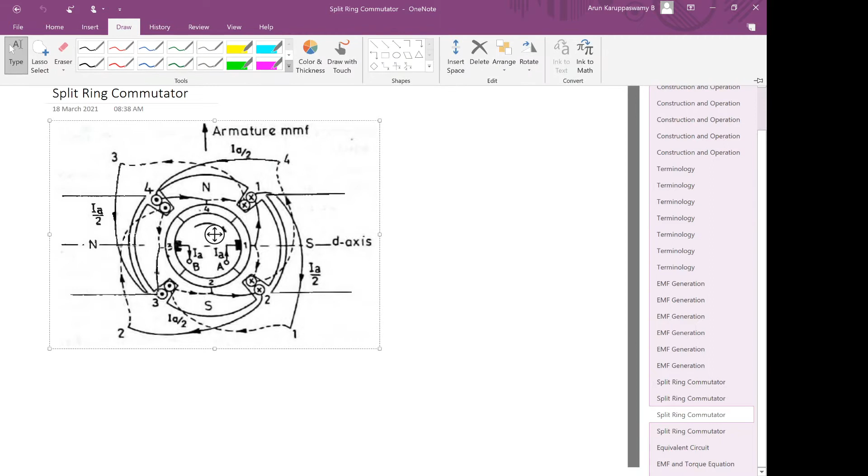So the process is reverse here as compared to a generator. Here DC is being supplied and it is getting converted into AC. So we can say that the conversion is from DC to AC - it is an inverter, an inversion process is being done, it is getting inverted. Earlier it was rectified, now it is getting inverted.

Let us try to understand how this happens. To understand this, let us take a two-pole DC machine again, but here we would like to understand a few more concepts related to the actual DC machine. So we will consider more number of slots and more number of conductors in the rotor. Instead of two slots which we had earlier, we now have four slots - slot 1, slot 2, slot 3 and slot 4.

So there are four slots, and in each of these slots you now have two sets of conductors. You need to understand that each of these conductors is part of a full pitched winding, a full pitched n-turn coil. So if we consider slot 1, there are two sets of coils, and we are just talking about one set of coil.

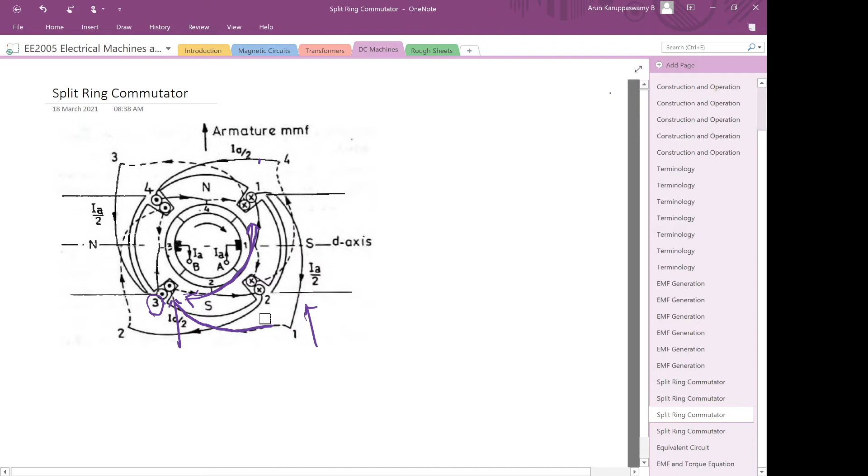Let me erase these things. Now we have got some basic understanding that there are 4 slots, and each slot has 2 coil sides, 2 sets of coils. Because you need one coil from one slot and another coil side from another slot to make one n-turn winding, you can expect that. So there are totally 2 plus 2 plus 2 plus 2 equals 8 crosses or dots that you see. So 2 of them together make one n-turn coil, which I had drawn now. So this one n-turn coil requires 2 of them. We have totally 8, that means 4 n-turn coils are present in this drawing.

You need to remember that each of these coils which we are drawing are themselves made of several turns, like we had seen earlier. They are made of several turns of the winding, so they are drawn like this. They are n-turn coils, they have n number of turns, each of them. So this is what you get. We have 4 n-turn coils which are placed in these slots in this particular drawing.

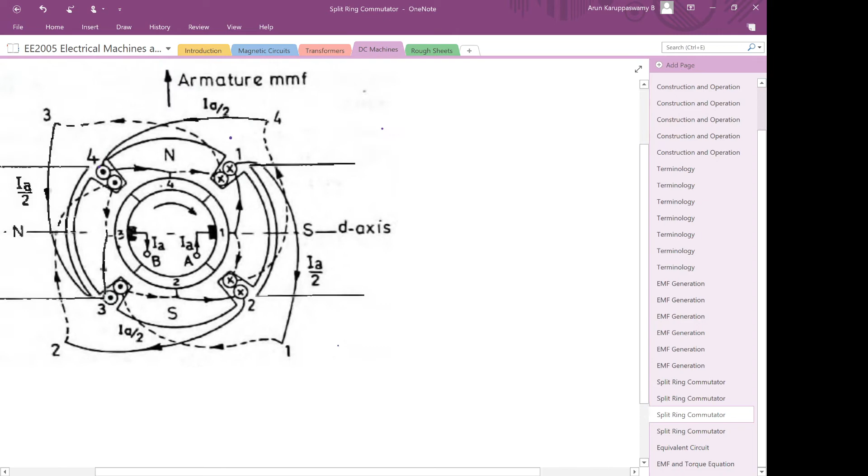Now the current which is entering here enters into A and then enters through the brush, it enters segment 1. You can see that there are 4 segments in the commutator. The brushes are only 2 in number, but the number of segments of the commutator has increased because there are 4 slots, there are 4 segments. Earlier there were only 2 slots and there were only 2 segments, segment 1 and segment 2, because 2 slots were there. Whereas here now in the present case there are 4 slots and so there are 4 segments.

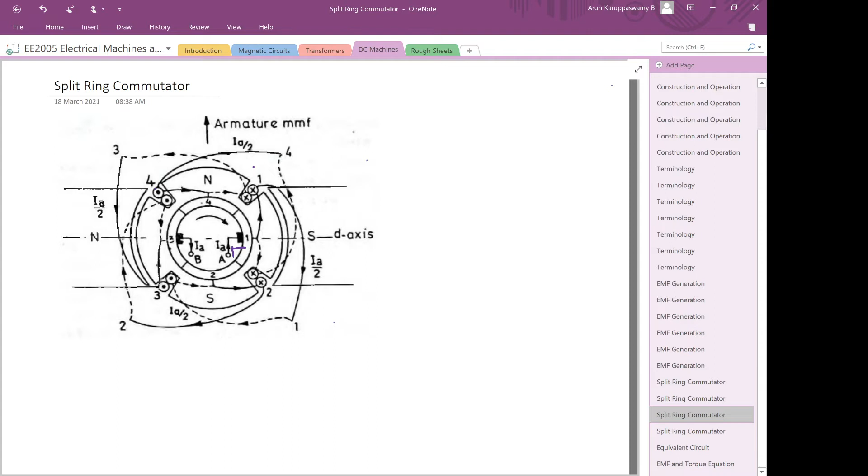Now let us see what happens. The current enters through A into segment 1, and in segment 1 you can see that the current splits into 2 paths. One goes to the top conductor of slot 1. Let us call this as top conductor and this is bottom.

The current coming in has two paths. The total current is shown as IA, it enters here and splits into two: one path goes to the top conductor of slot 1, and the other goes to the bottom of slot 2.

Since it is a full pitched coil, from the top conductor of slot 1 it goes all the way to the end, then back to slot 3's bottom conductor, carrying a current of IA by 2. Similarly, slot 2's conductor carries current all the way through and back to slot 4, also carrying IA by 2.

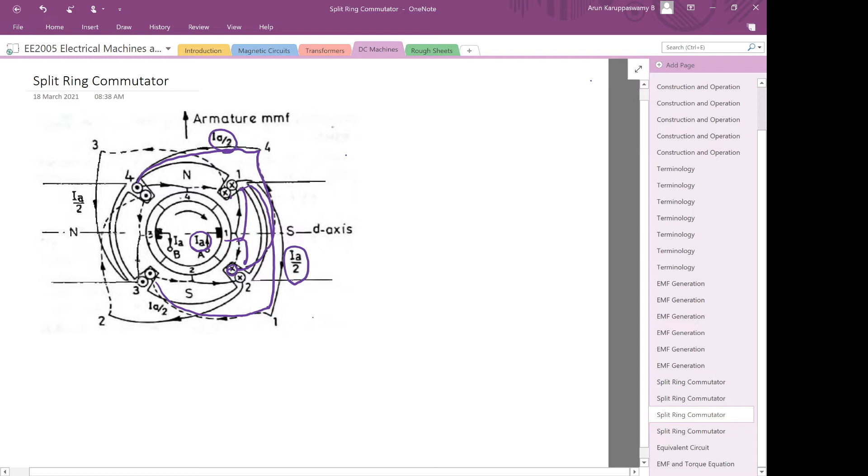So the total current supplied from outside, indicated as IA, the armature current, splits itself into two parallel paths from here. Let us try to trace these paths.

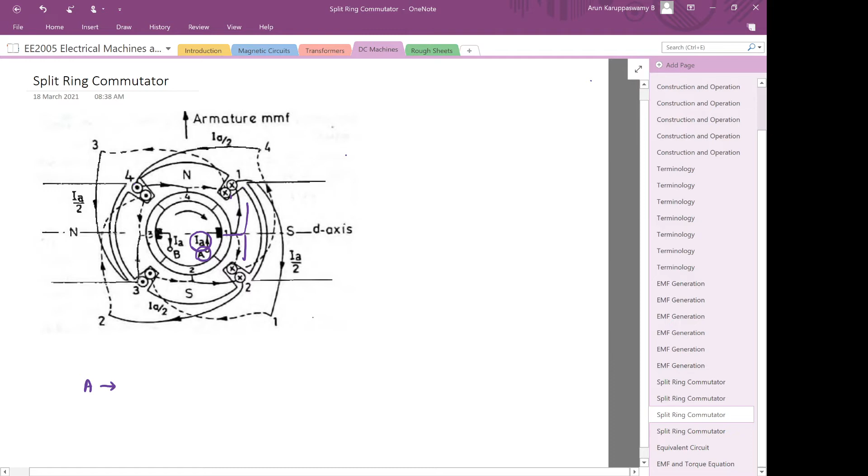The first path enters at A, goes to commutator segment 1, and from commutator segment 1 it goes to slot 1's top conductor, then all the way to slot 3's bottom conductor.

From there it goes to commutator segment 2, and through commutator segment 2 it reaches slot 2's top conductor, then all the way to slot 4's bottom, then to commutator segment 3, and then out again to B.

So from A you get IA, and from B you get out IA, but from C1 it splits into IA by 2 only. So from here to here it is only IA by 2 — this is one parallel path.

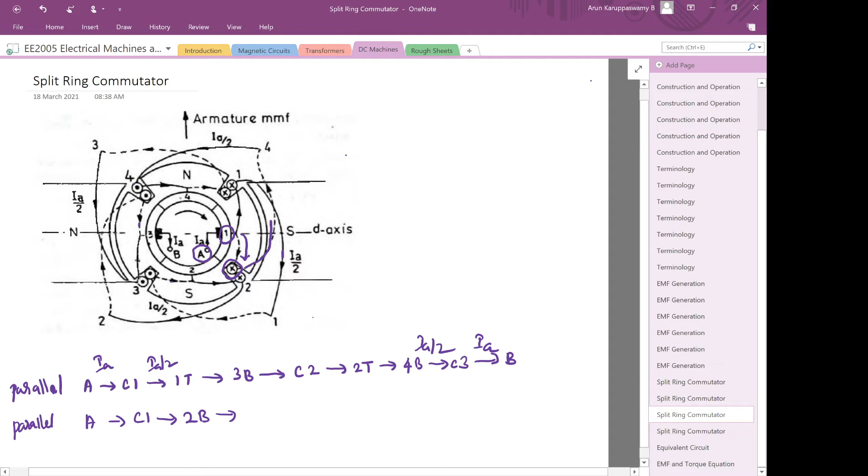Because it is a full pitched coil, it has to travel 180 degrees, so it goes to top of slot 4, then to commutator segment 4, then to slot 1 bottom, then 180 degrees again to slot 3's top, then to commutator segment 3.

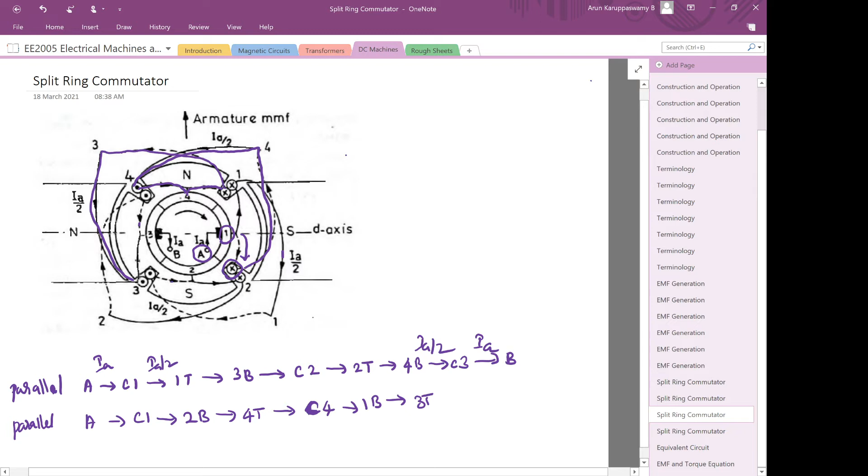Then it goes to B. Here again it is only IA by 2 and IA by 2. So you can see that from C1 it takes two paths, and similarly from C3, two paths come and merge — from 4 bottom and 3 top it comes to C3. So there are two parallel paths for the current.

If we try to put it in schematic or circuit form, you will find that the current enters through A, then there is a brush, and this current IA goes to two different sets of windings. One is slot 1 top and slot 3 bottom.

You need to remember that this winding is an N-turn full pitch coil, so it goes to an N-turn full pitched coil starting at slot 1 and ending at slot 3. At 1 it is a top coil and at 3 it is a bottom coil — let us just call it 1-3 for simplicity.

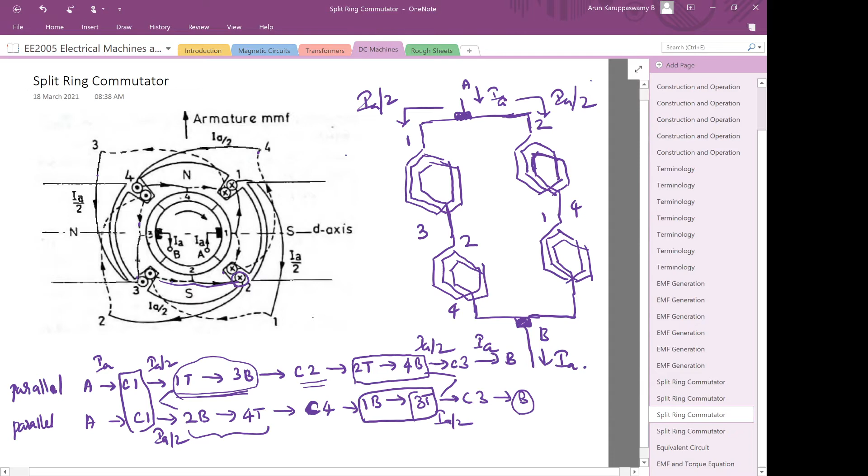So through a brush it enters, and then the currents split equally and go through two sets of series connectors. So there is a parallel connection, two parallel paths are there, and then two series paths are there in each of these parallel paths. Okay, so there are two series connected windings, and each are n-turn winding.

So this is an n-turn winding, this is an n-turn winding, this is an n-turn winding, and this is another n-turn winding. Okay, you need to remember that each n-turn winding itself has 2n number of conductors, because each n-turn has two coil sides.

If you take a one turn of a coil, then you know that this is one coil side, this is another coil side. We have seen this earlier. So when we talk about n turns of a coil, we are talking about basically 2n conductors. Okay, 2n conductor coil sides. So one turn has two coil sides, and so this n turn has 2n coil sides.

So totally there are 2n into 4, so 8n coil sides or 8n conductors which are connected in some fashion to get this thing. Okay, so this is one aspect that we need to know, that in the actual DC machine the connections are made in some series and parallel arrangement, and that together gives rise to some voltage.

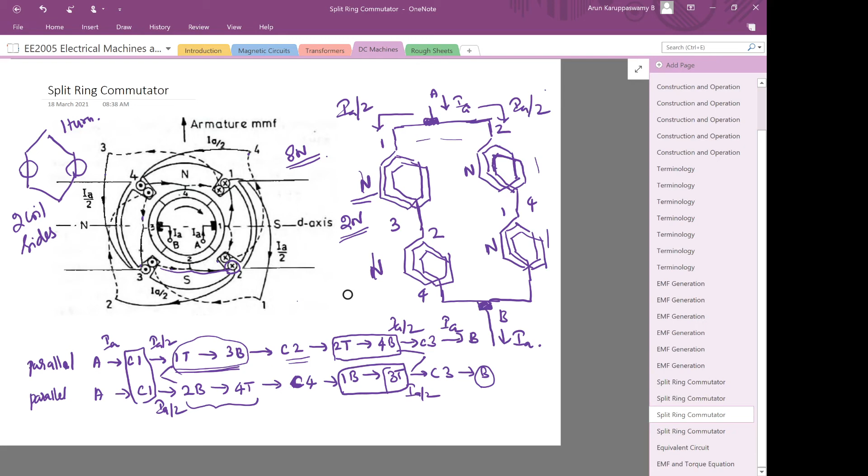Okay, so you need to understand that these parallel paths, different parallel paths, help in sharing the current. These parallel paths help in current sharing, so that for a given size of a conductor, if you have more parallel paths, you can increase the current rating. And the series connections can help in achieving higher and higher voltages, because for one n-turn coil you have already derived a certain voltage.

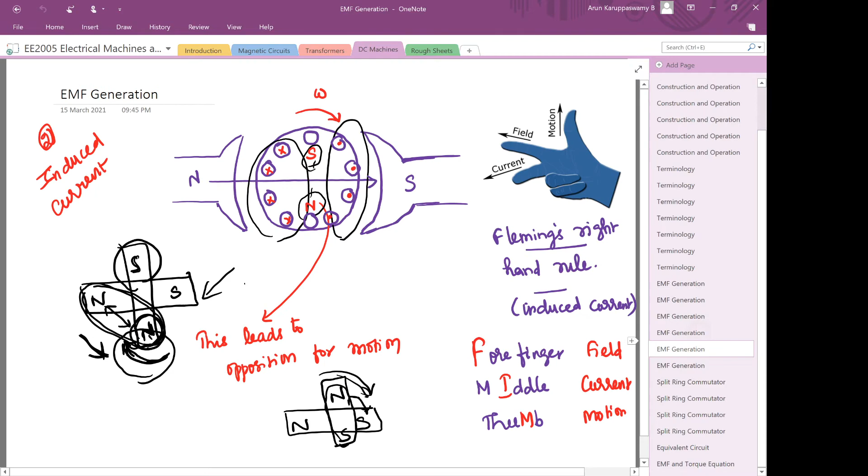You know that the EMF induced for one n-turn coil is given by this expression. So if you have another set of n-turn coil and you connect them in series, then the total voltage will add up. So you can expect that the total voltage will go up.

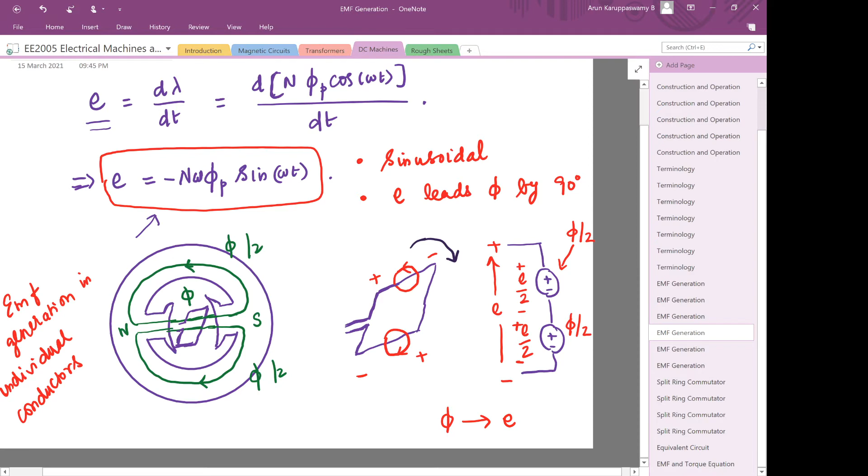Okay, anyhow, you need to remember that when you are adding two AC voltages, they will add up vectorially. We will come to that series, means how the voltages add up, a little later. So as of now, you can understand that if you want to increase the voltage level, then we need to series connect the coils, and connecting having parallel paths will increase the current rating.

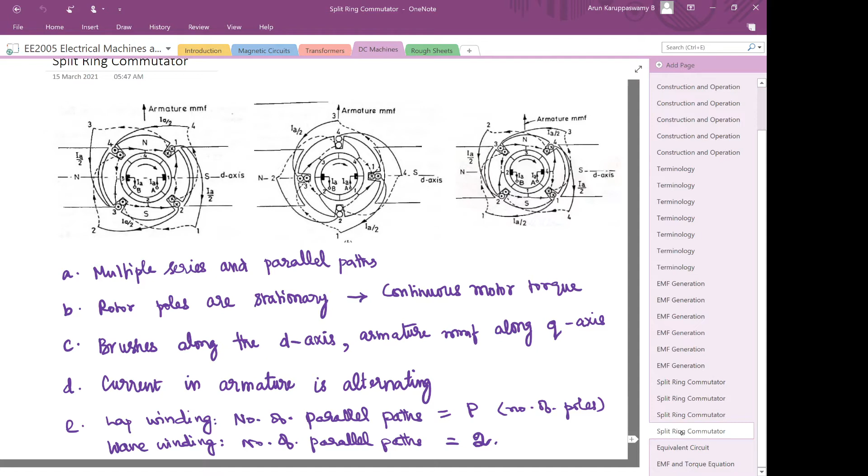Okay, so with this idea, let us now look at what happens when the rotor rotates. So this first drawing is the same as what we were discussing now. So the current enters and there are four commutator segments, and you have a certain connection, interconnection.

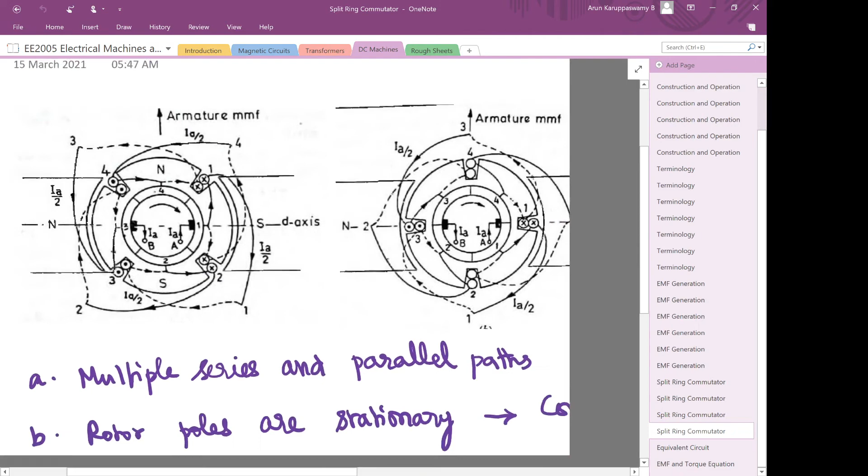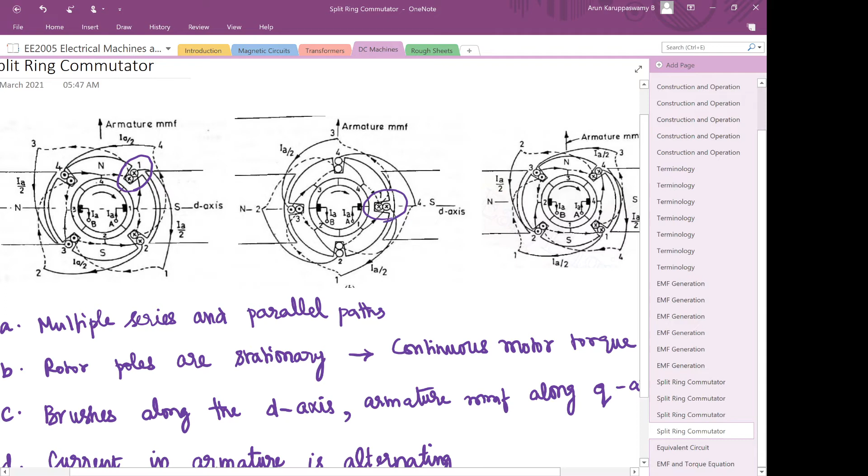Now let us say that this rotates by 45 degrees, then this first slot will come here. Similarly, this slot 2 will go here, and so on. So when you rotate the rotor by 45 degrees, this is what happens. If you consider this as the reference 0 degrees, then this will be 45 degrees and this will be 90 degrees from that. What I mean is, if you take this first drawing to be a reference of 0 degrees, then after 45 degrees is what you get, and after 90 degrees is what you get this.

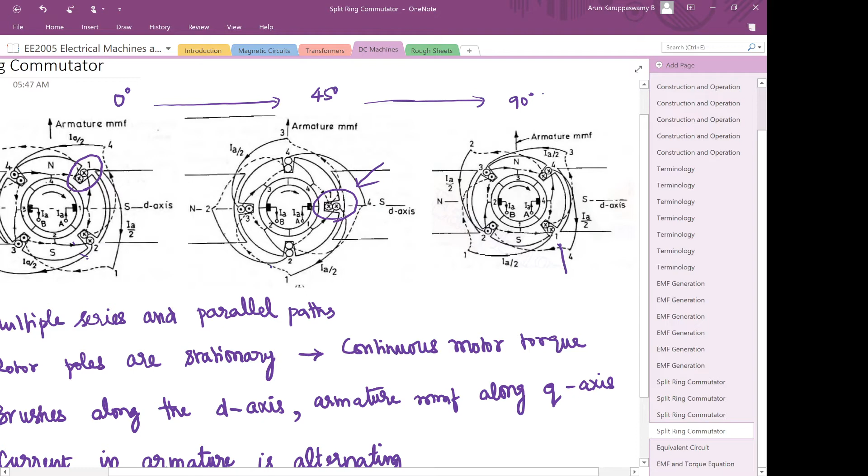Okay, so you can see that again, one to start with was here, and one moved to this point after 45 degrees, and then again it moves to this point after another 45 degrees. So likewise it is rotating.

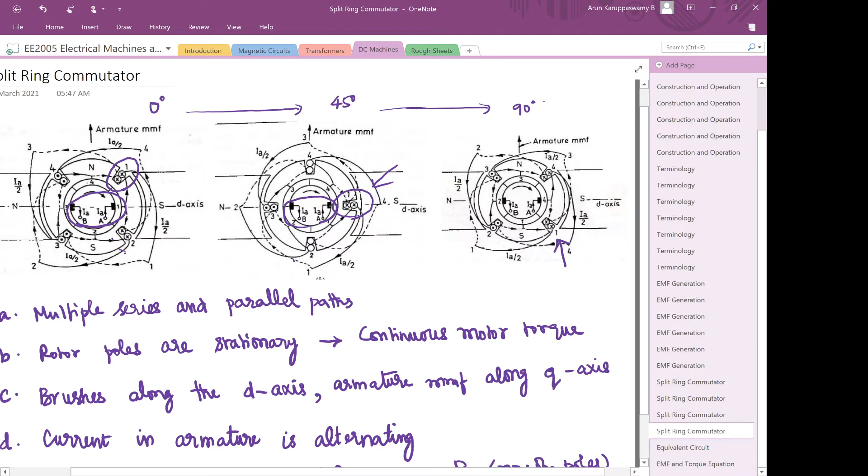There are a few observations you can make here. If you look at this segment arrangement, the brushes are always stationary, they remain in the same position, and usually these brushes are kept along the stator axis - north, south. North is here, south is here. So the central line connecting these two is the axis for this north-south pole.

This magnetic axis of the stator is called the direct axis, and the one which is perpendicular to that is called the quadrature axis. Quadrature means at 90 degrees, so at 90 electrical degrees to it is the quadrature axis.

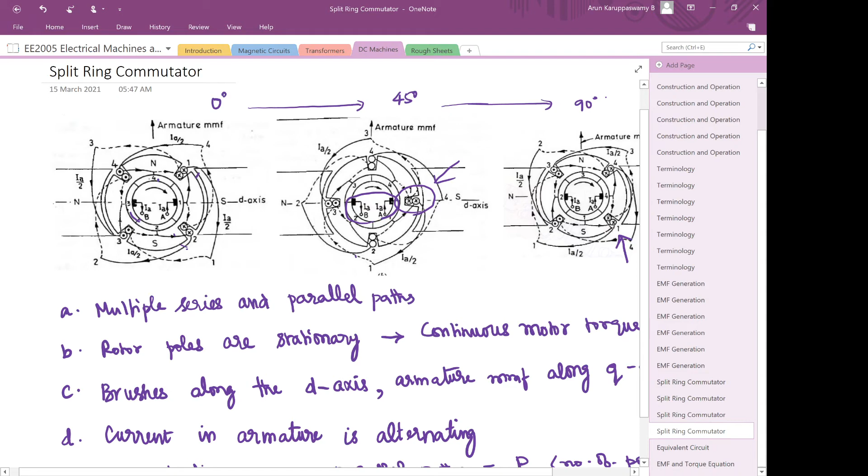Now usually these brushes are always kept along the direct axis. There is a reason for that - keeping it along the direct axis helps in a certain way. Let us see what happens.

If you keep the incoming brush here, you can expect that the conductors on this side, because this is connected to whichever segment is appearing here, the current will enter through this and split through these two. So current will always enter into the coils at these locations, or the conductors here will always be X marked - that is, current going into the coil at this corner.

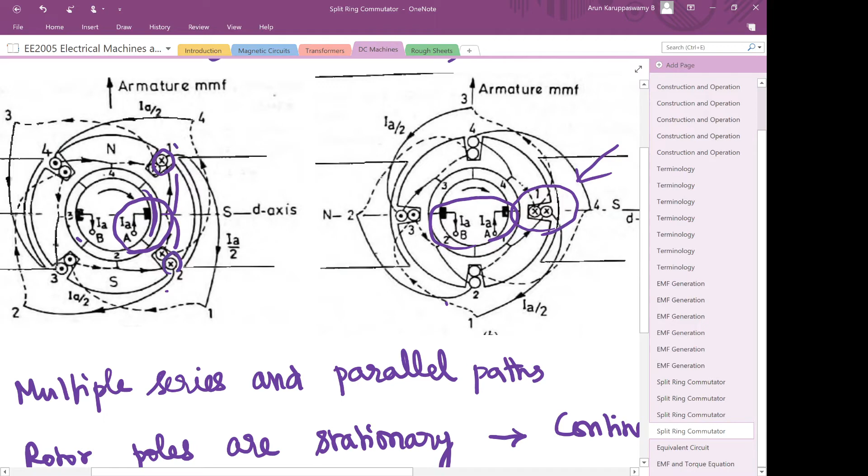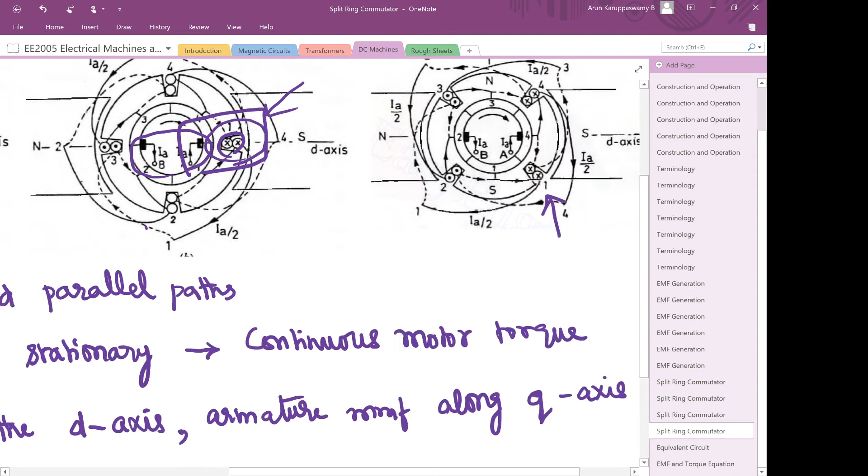That is because you have the brush fixed at the same location. So here is the location where the current is entering. It will go through some nearby segment, split into two, and enter the coil at these two locations. You can see in all these drawings that the coil on this side will always have X marks - the current enters, splits into two, and goes into the coil here and here.

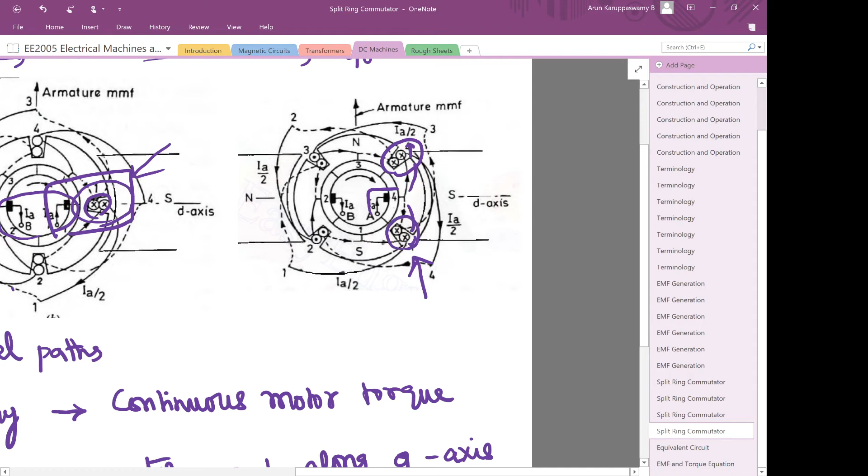So if you analyze in the same way as before, you will find that the coils under the south pole of your stator will always have the X mark, and the other side will always have the dot mark.

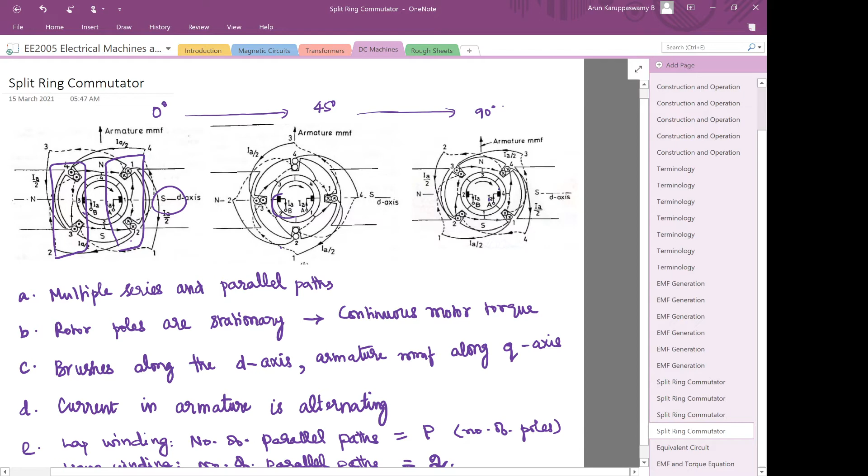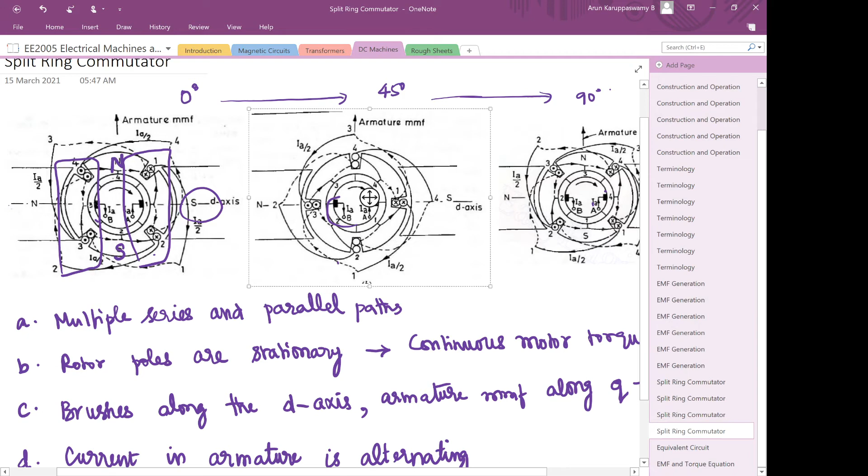Because of this, for the rotor, this will always be the north pole and this will always be the south pole, irrespective of the rotor rotation. This happens because of the commutator in a DC motor or even a DC generator - the north and south poles of the rotor are always fixed even though the machine is rotating, because of the commutator plus brush action.

Because the commutator brush is fixed to one location along the direct axis of the stator, this enforces the north and south poles to be fixed along the quadrature axis.

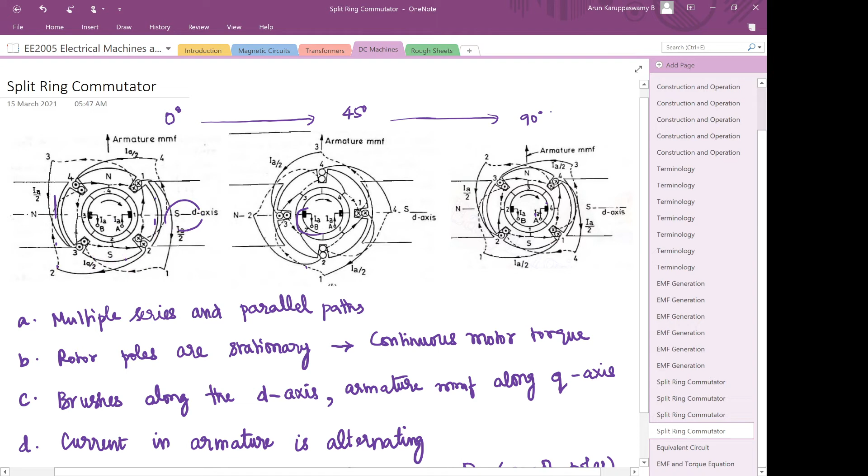Now this helps in a way, because we had already seen that in case of a DC machine operating as a motor, the motor rotates because the north-south pole here tries to align along this north-south pole. That is what helps in the rotor rotating.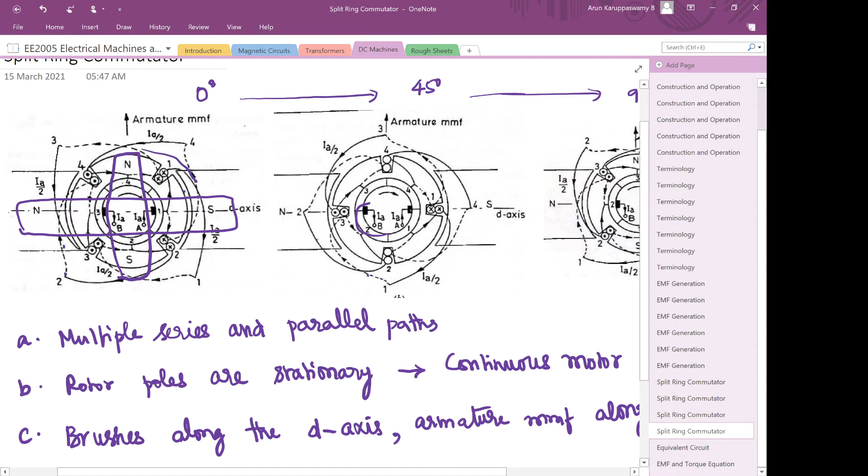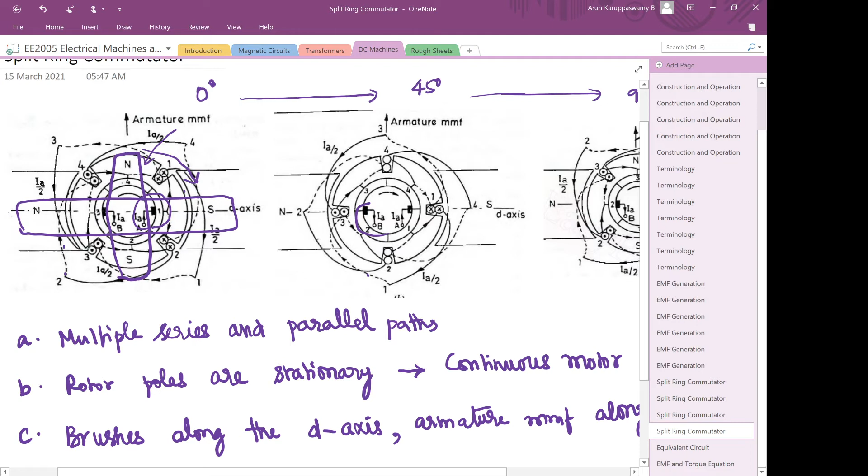As the rotor rotates, its north and south poles do not change location, because as the motor starts to rotate, the commutator action makes sure that even though the conductors have moved to a new location, the north-south poles of the rotor remain in the same line, irrespective of the motor's rotation. Thereby this north-south pole of the rotor stays fixed to one location.

This helps in the continuous rotation of the rotor. In case this north-south pole had moved along with the rotor motion, we couldn't have had continuous rotation, because once the two magnets get aligned, the rotor rotation will stop. Whereas here that does not happen, because the commutator helps maintain the north-south pole along a particular direction in a DC machine.

So this is an important aspect of the commutator plus brush arrangement when it comes to motor operation.

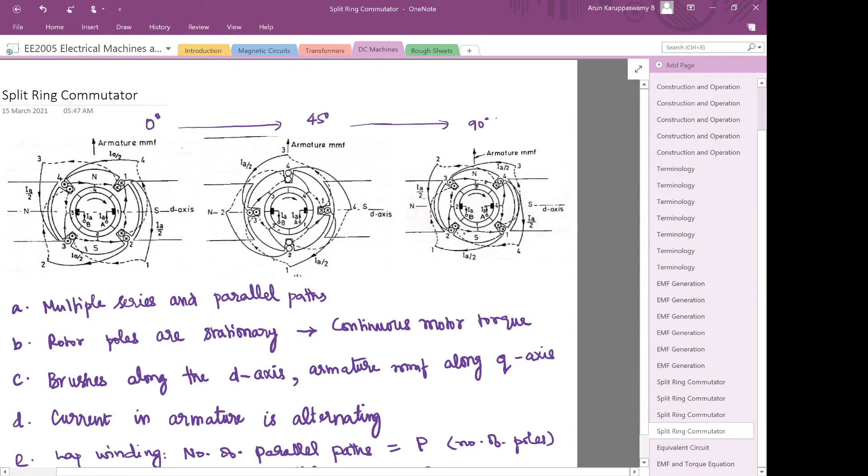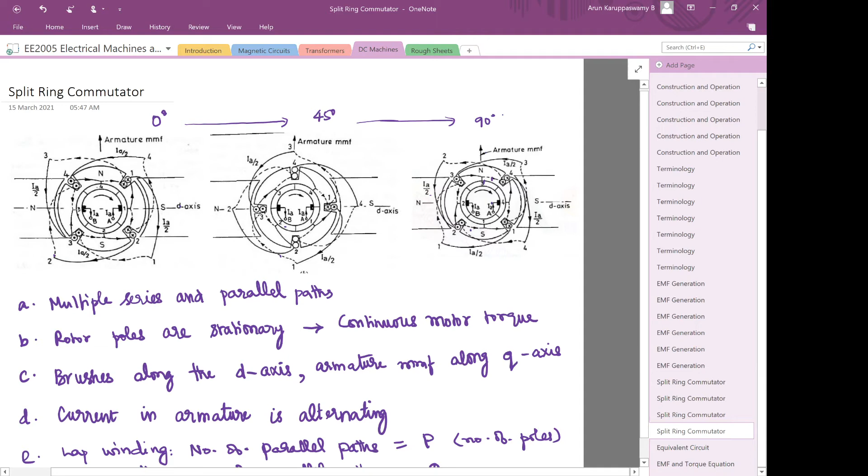So we can say that for a generator operation, the purpose of the commutator plus brush is to convert the AC quantity into a DC quantity, whereas in case of a motor, it helps in keeping the magnetic axis of the rotor aligned to a particular direction which is in quadrature to the stator magnetic axis. This is one important thing that you will have to know.

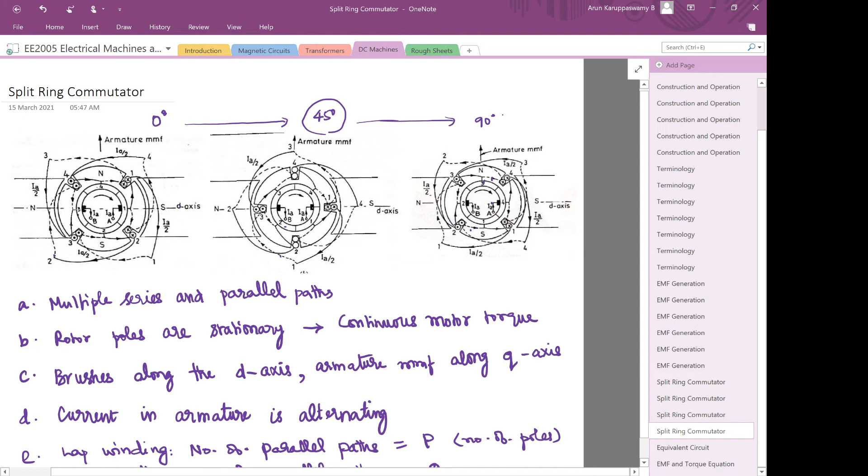Second, let us try to see what happens at 45 degrees. If you see at 45 degrees, you will find that the current that is coming in takes two paths, one through this and one through this.

Let us try to trace the first path. The current IA comes in, then goes to segment 1. Actually this brush is at the common point between 1 and 4, shorting segment 1 and segment 4. There is an insulation material in between, but nevertheless this is connecting both 1 and 4, so it is actually shorting segments 1 and 4.

So now the current enters here, goes through segment 1 as one path, and through segment 4 as another path. The current through segment 1 comes to the top of coil 1, slot 1's conductor top, and then goes 180 degrees to slot 3, and then comes to segment 2, and from segment 2 it goes to the top of conductor 2, slot 2, and then from there to slot 4, the bottom conductor. But this carbon brush is shorting segment 4 and segment 1.

Because conductor 2 and conductor 4 are connected to segment 2 and 4, these two also get shorted. Let me show you again clearly, so you will be able to trace the path from IA through conductor 1 and so on. Conductor 2 is connected to segment 2, and conductor 4 is connected to segment 3, and this brush shorts 3 and 4, so it actually shorts conductors 2 and 4.

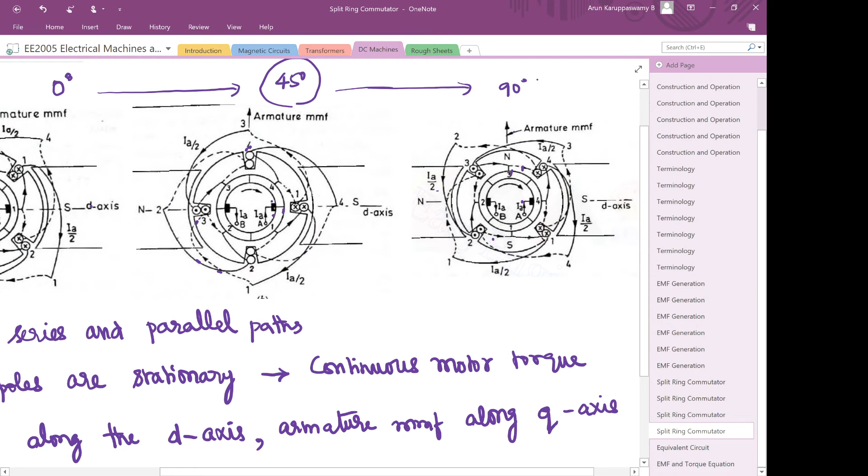Similarly, the other set of conductors, 4 and 2, gets shorted through the brush on the other side. So essentially, at the transition phase, the voltage across one of the two sets of conductors becomes 0, because as we know from earlier, the coil voltage is sinusoidal in nature, and at 0 degrees and at 180 degrees the voltage has to be 0. If you see, this coil location is at 0 degrees and this is at 180 degrees, so these coils will go through a 0 voltage. That essentially happens by the shorting of these commutators through this brush arrangement.

So you can essentially say that this gets shorted, and similarly this also gets shorted at 45 degrees. You can again go back and analyze this. You will find that when you trace the path, coil 2 and 4's ends get shorted through the brushes, one is brush 2 and one is brush 1 - brush B and brush A. These essentially short these conductors, so the voltage across this is going to be 0, and similarly the voltage across this is going to be 0.

But still, you should know that the current splits IA by 2 on each side, and comes till here, then goes through this short and then goes here. Similarly on the other side, the current IA by 2 goes through this short, through these conductors, and then comes out through this. So only one of the coils' voltage is 0, but the currents in the two paths still remain IA by 2. The currents split into half like earlier, but only the voltage in one of the conductors is going to be 0.

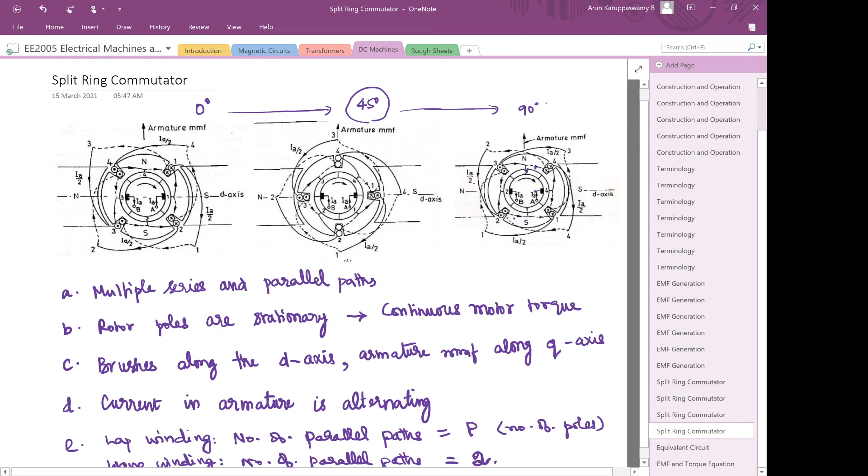Then after 45 degrees you can analyze what happens to these different coils. I do not want to repeat the same thing, but I would like you to observe that if you look at these three drawings, the currents in this conductor in slot 2 are initially going into the coil, then the current in this coil becomes 0, and thereafter at this position the current in the same slot 2 conductors are coming out. Here it is into the coil, here it is 0 because it is getting shorted.

The conductors are bypassed through the commutator, and here the current is out of the plane. That means the current has changed its direction from the time it was here to the time it is here. So the current was positive, then it comes to 0 during this time, and then goes to negative during this time. So even though the current coming to the brush is all in the same direction, that is DC, inside the conductor the current actually becomes AC, through the commutator action.

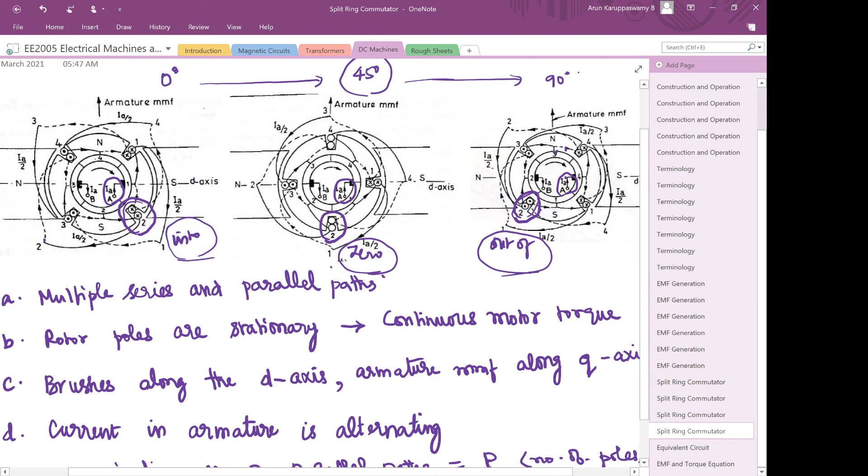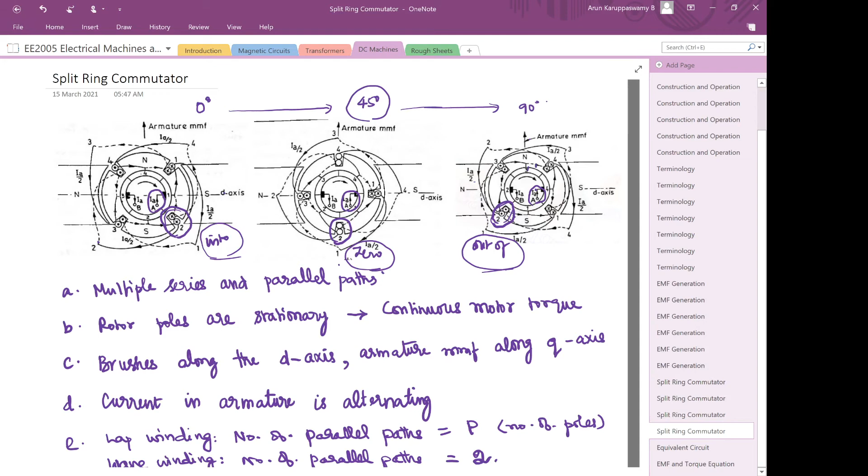As the rotor is rotating, the current becomes 0 and then becomes negative. It is positive, 0, negative, and this cycle keeps repeating. So this way the commutator also helps in converting from DC to AC. It is called doing an inverter action in case of a motor.

So you have multiple series parallel paths for the conductors. Rotor poles are stationary, so that continuous torque is there, and brushes are along the D axis while armature MMF is along the Q axis, that is the rotor's MMF is along the Q axis. Current in the armature is alternating.

There are many different combinations of parallel and series possible, and in DC machines there are two types of winding arrangements. We are not going to see the winding arrangements in detail, let us just know that there are two types: one is called the lap winding and the other is called the wave winding.

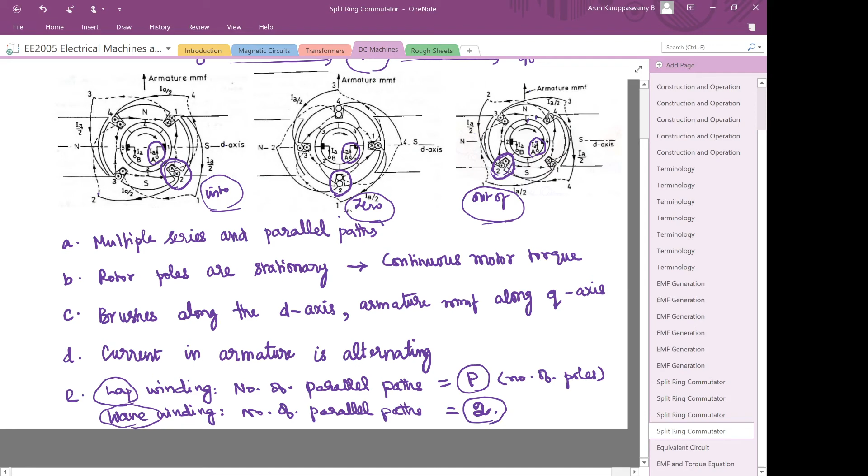In case of lap winding, the total number of parallel paths is equal to the total number of poles. If it is a 2-pole machine, it is just 2 parallel paths; if it is a 4-pole machine, it is going to be 4 parallel paths. Whereas in case of a wave winding, irrespective of the number of poles, the number of parallel paths will always be 2. So if you are given a problem and told it is lap winding or wave winding, accordingly you can assume the number of parallel paths.

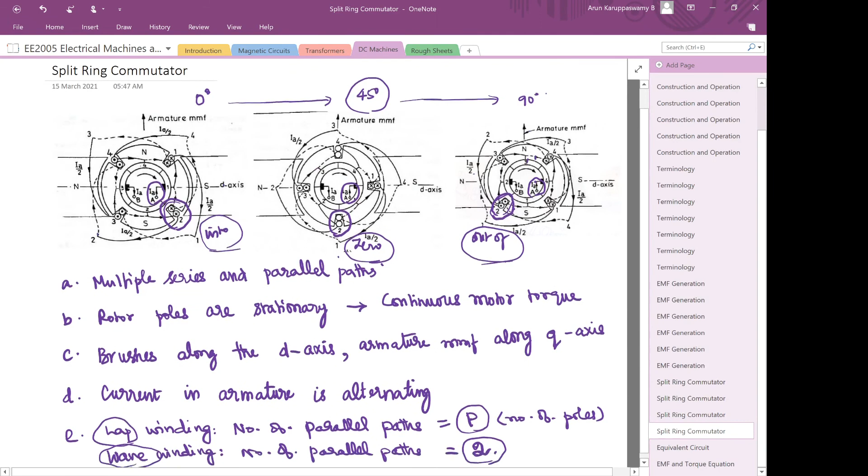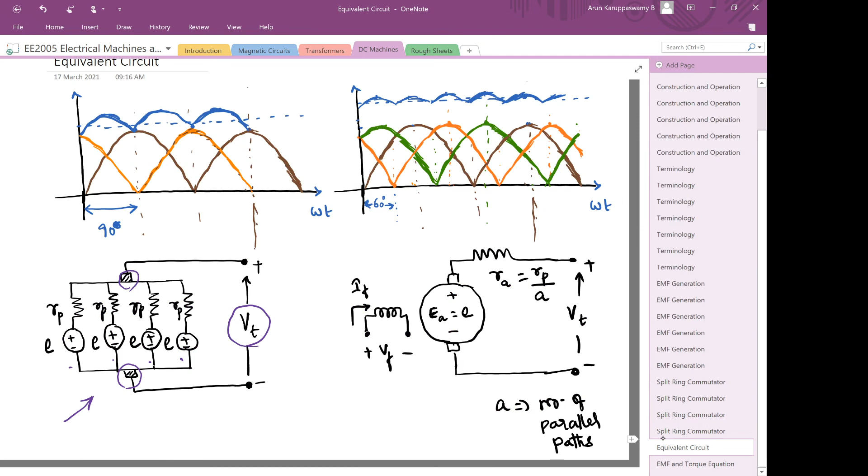Depending upon the number of parallel paths, you have a number of lines like this, and in each case the voltages are all the same. Because if you look at this, you have 2 sets of n-turn coils in series, so there will be a certain voltage, and you can expect the similar voltage in the other parallel path also. Since they are all parallel connected, their voltages have to adjust to be the same. So now let us have an ideal assumption that they are all equal.

So all parallel paths will have a generated voltage which is equal, and I have additionally shown some resistances to indicate the winding resistance. Because this is all DC circuits, we need to have only resistive elements here in the model. So we have 4 resistances which are connected each in series. This is basically the model for your DC machine.

Now let us simplify this model. If you make a Thevenin circuit equivalent of this, the open circuit voltage will be equal to this E itself, because all are in parallel. When there is no current flowing, that is the circuit is open, you can expect E to be the voltage. So the Thevenin equivalent voltage is E, let us call it EA, or the armature voltage, and you have the brushes indicated here.

Then if you find the Thevenin resistance by shorting all these voltages, you will have all the resistances coming in parallel. So you have Rp by A, assuming all parallel resistances are of the same value, where A is the number of parallel paths. In this case there are 4 parallel paths, meaning it is Rp by 4. That will be the equivalent Thevenin resistance. So this represents the equivalent circuit of a DC machine.

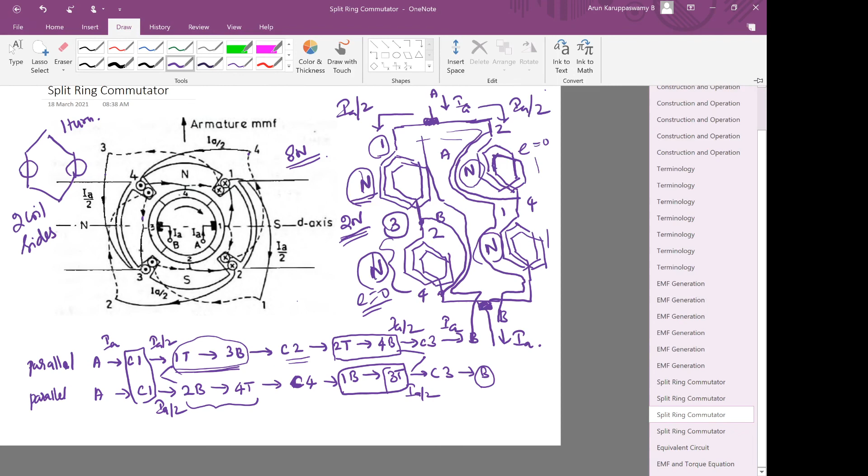Now let us look at what happens when we connect these sets of coils in series. Let us look at this drawing to gain some understanding. Coils 1 and 3 are connected, let me pick a different color, so coils 1 and 3 form one set, and it is series connected to 2 and 4.

So 1 and 3 make one set of n-turn coil winding, and 2 and 4 make another set of n-turn coil winding, and they are both series connected. Now if you look at this set and this set, they differ by an angle of 90 degrees. The angle between these two sets of windings is 90 degrees. As the coil rotates, considering only one set of winding, we know it has a voltage which is sinusoidal in nature, and through the commutation process it gets rectified and appears like this.

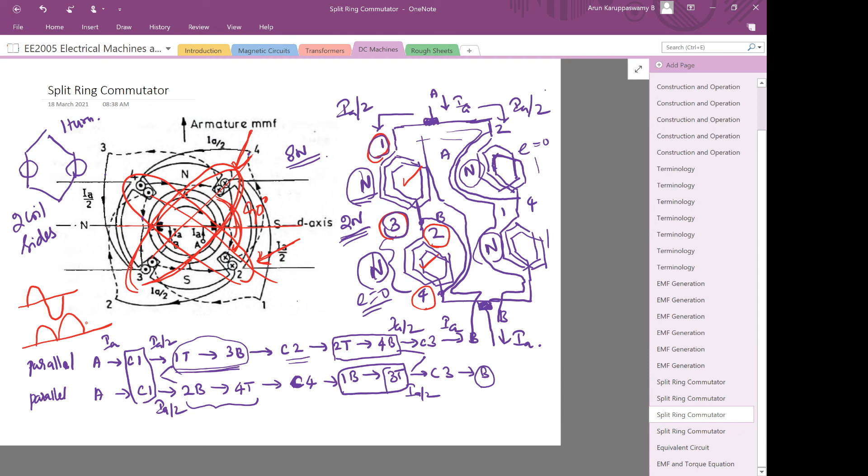Now if you take another set of coil which is also rotating at the same speed, but starts 90 degrees away from this, its voltage will be same as this but 90 degrees later. You can expect the other coil placed 90 degrees away from the first coil to have a voltage similar to this, but starting 90 degrees later. This also gets rectified, so its voltage will look like this.

So if we assume two sets of coils placed 90 degrees apart, this brown colored waveform and this orange colored waveform are the voltages of those two windings. They are both rectified sine waves moved by 90 degrees. Now they are series connected, so at every point they get added. At this point, if you add them, it is 0 plus maximum, so it becomes this blue waveform. Similarly at all other points, when connected, you get this blue colored waveform.

Now you can see that with the individual orange or brown colored waveform, the DC quantity was very far away from the actual instantaneous values, whereas now when they get added, there is less ripple or variation in voltage. As you move from one end to another, the variation in voltage is very less, and they are closer to the total average value.

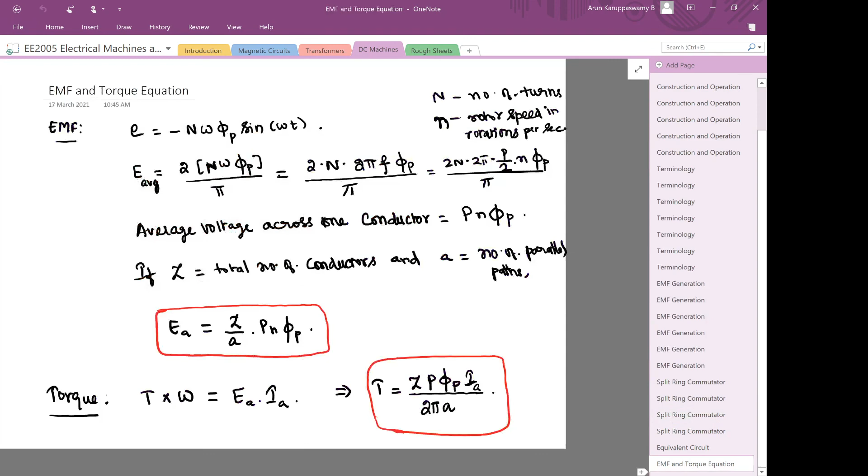So this is something you will have to know. With this we will stop for today. I think we may not have time to discuss the EMF and torque equation, I will take it up in the next class.

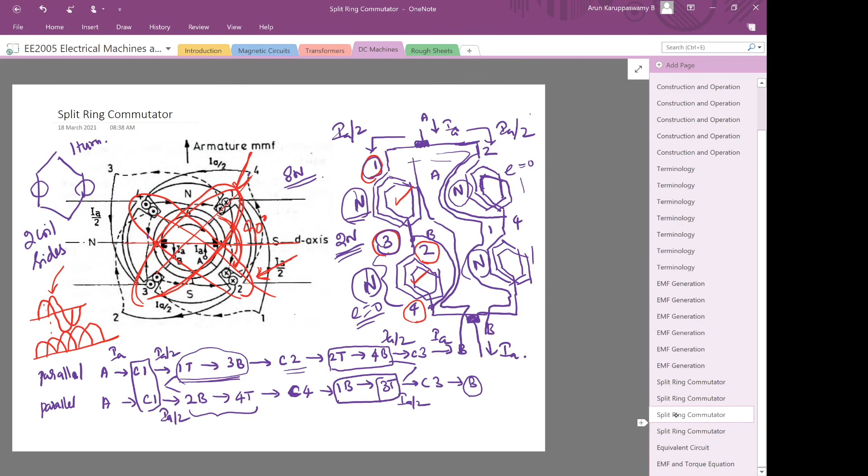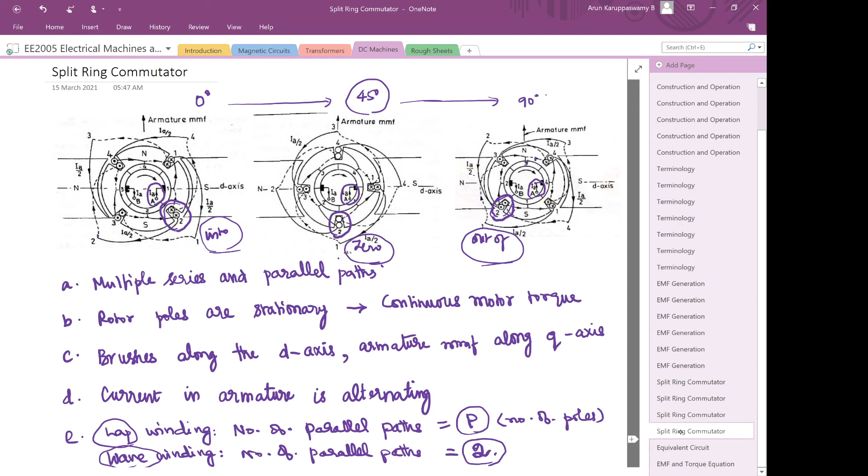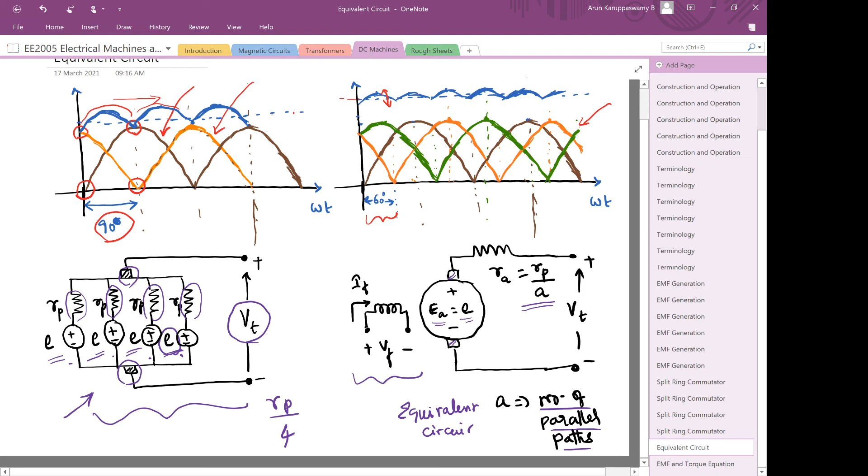So if we quickly recall, we have seen what happens in the case of the use of a commutator and brush arrangement in a motor. It helps in keeping the rotor's magnetic field aligned at a particular angle always, irrespective of the rotor rotation. We have also seen the parallel and series connections, derived the equivalent circuit, and seen the effect of series connection of n-turn coils. So we will stop with this for today and continue in the next class.